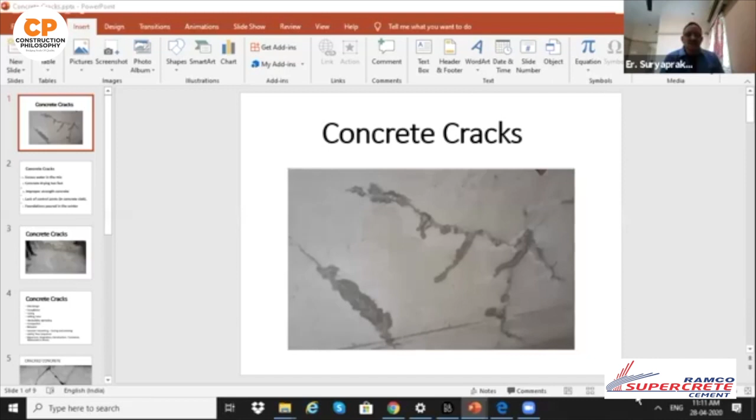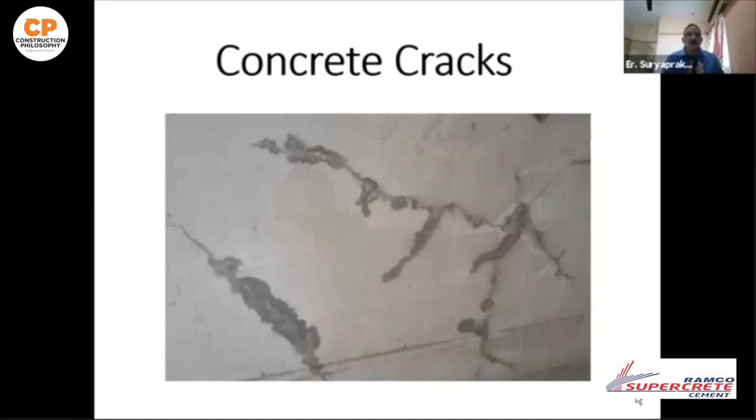Can you tell us how to classify it? Okay, so I'll be sharing my screen and give a small slide presentation for 2-3 minutes. As you can see, cracks in concrete can be classified into two basic categories. One is non-structural, that is cracking due to bad concrete itself. What we are seeing here is bad concrete cracking, as shown on screen. The other cracks in concrete are due to structural issues. Today we'll focus on concrete cracks by itself, since structural issues are a huge subject on their own.

So the main reasons for cracks in concrete are excess water in the mix, meaning water-cement ratio used more than the design mix; concrete drying too fast due to dry climate or higher temperatures like summer in India; and improper strength concrete, meaning the concrete mix not complying to the design mix.

Then lack of control joints. These are joints we provide in concrete because of the time taken for concreting. Sometimes they're called cold joints, sometimes construction joints, sometimes working joints, and expansion or shrinkage joints—many types of joints exist. If we don't provide the joints required in the concrete, that can also cause cracking, mostly in floors and large areas of concrete.

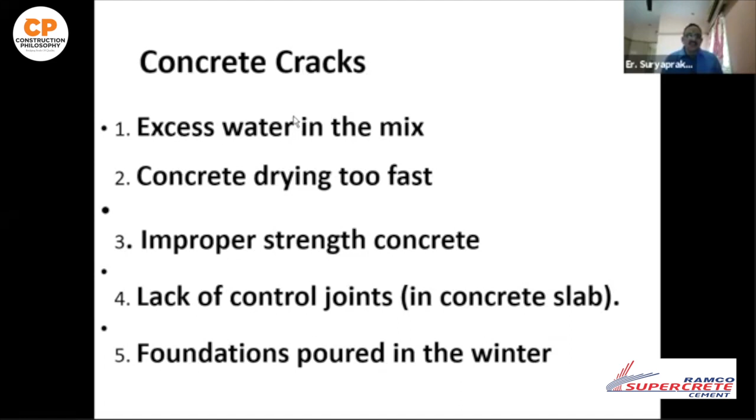Then foundations—whenever foundations are cast during winter, due to low temperature, cracks can happen. This is a crack being monitored. You can see on the screen the extent of the crack in the floor; we dig into the crack and see its depth, and monitor the progress of the crack also. This is the flooring, you can see.

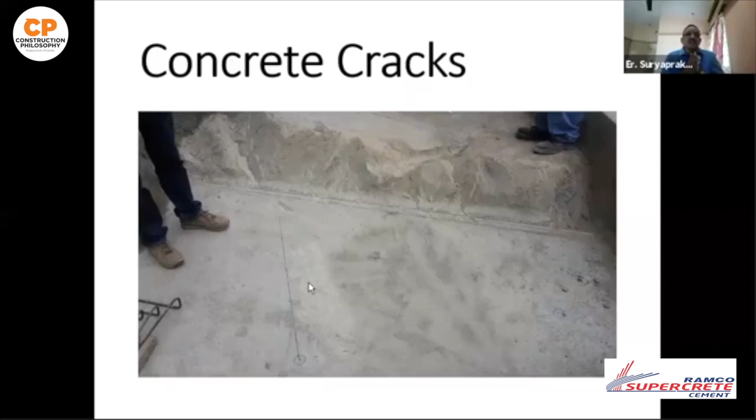So now, the causes for cracks in concrete include mix design compliance—whether it's aggregate quality, aggregate source, or cement quality and cement source—and then curing period, type of curing, and setting time. This is a major cause, actually, of what I have come across in the project.

The ready-mix concrete, particularly concrete from a batching plant, whenever we use the retarder, the design of retarder would not have been adequate, and then there should have been initial setting, and then we'll use the concrete which has already set initially. That will cause problems in workability and spreading. Even concrete compaction can also cause problems if we don't properly compact, vibrate, or spread the concrete across. And then retarders are used in ready-mix concrete to delay the initial setting time.

And then summer concreting. This is a major thing we face in dry climates, particularly in summer, when quick setting happens and shrinkage cracks start forming even before final setting happens. So for that, the solution is to cover an LDP sheet as we pour the concrete so that evaporation is controlled and proper setting happens.

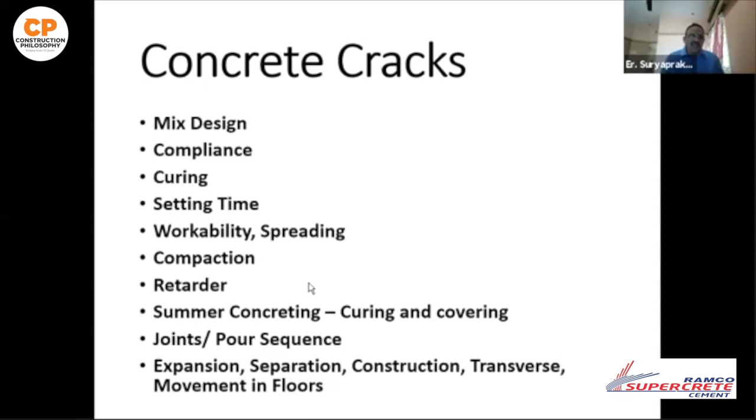As per IS code, you should not have a concrete panel more than 20 square meters. And also allow movement in the floor, because most of the time we have these floors on a PCC. So due to friction at the bottom, there will be movement, and at the shrinkage time, there will be friction and movement in the top layer, and there will be cracks in the top surface. So we have to allow movement in the bottom layer of the concrete by providing an LDP sheet or a smooth surface. So these are the main reasons, and the concrete cracking can be so disastrous also if it is not properly done.

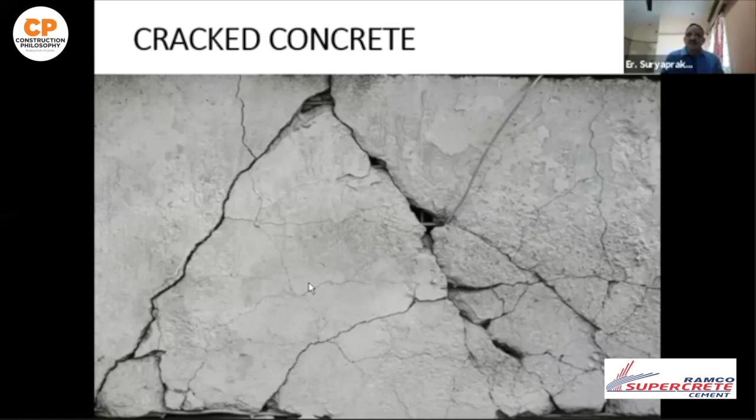This is a concrete where initial setting happened before pouring the concrete.

And reasons other than concrete itself are detailing also. If reinforcement is not provided where it is required in mass concrete, particularly all faces of the concrete should have reinforcement, and also the laps. In some case, we have come across in a column in a government project, the column, all the laps are provided at the same level, and when de-shuttering happened, the whole concrete cracked in the column. So this kind of cracking can also happen.

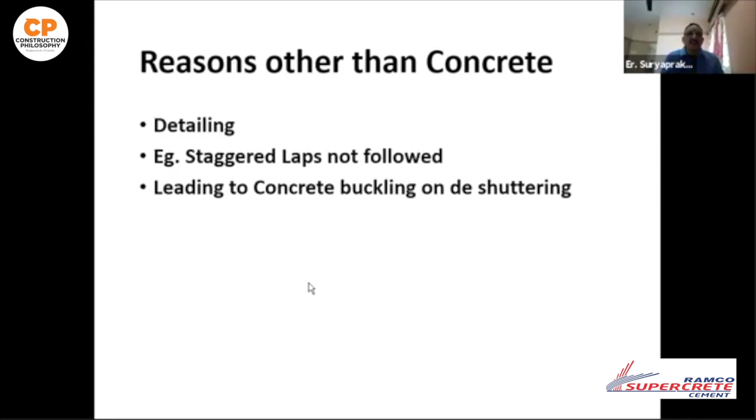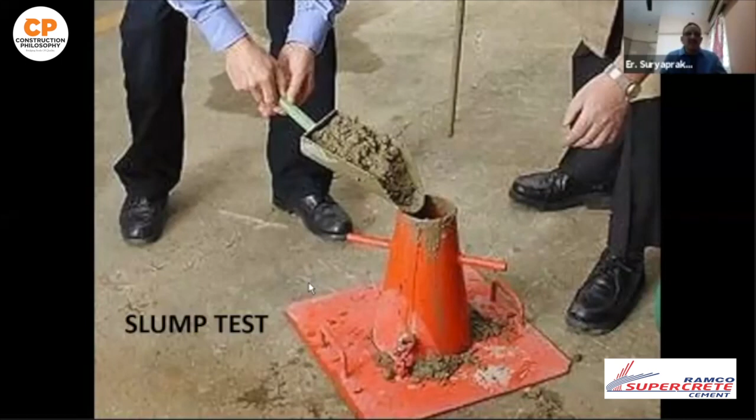And the quality test before and after is also very important for the concrete. So slump test, particularly for the workability, and spread test in case we use the flow mix. These are the requirements of all the tests to be followed meticulously as per the code provisions.

So finally, quality assurance can avoid cracks, quality ingredients can avoid cracks, and quality workmanship. And more than all this, the engineer has to engineer and the engineer has to do engineering. This is the main thing.

And as we all know, for the concrete to be ready, it takes 28 days for attaining its strength, and 40 days including prior preparation - aggregates, procurement, cement. So 40 days production time is not a small thing, and it requires proper monitoring to get concrete that is properly attaining its strength and durability. So that's my thing. So thank you, Nebu, for giving this opportunity.

The opinion is really clear, actually. I would like to bring in Dr. Sunita. Dr. Sunita, basically we have many aspects, many factors that affect the cracking of concrete, and that includes materials as well. So since you are into materials, what kind of strategy do you think we have to adopt for bringing in a crack-free concrete culture in terms of materials?

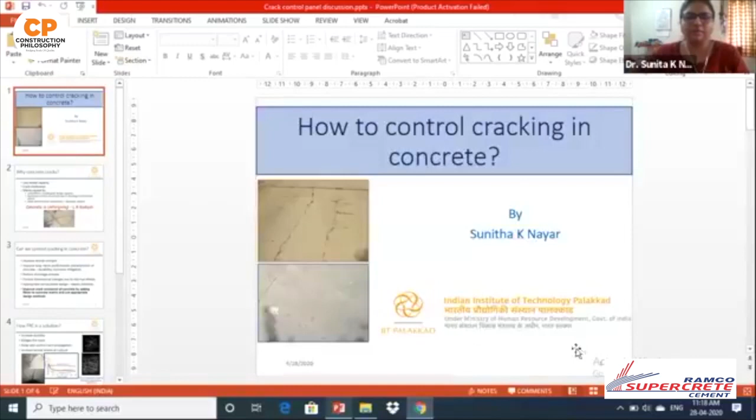Yes, yes, yeah. So good morning to one and all. I'm Sunitha, and I'm a faculty at IIT Palakkad. My area of expertise is in building materials and construction technology, and my research is specialized in high performance concrete.

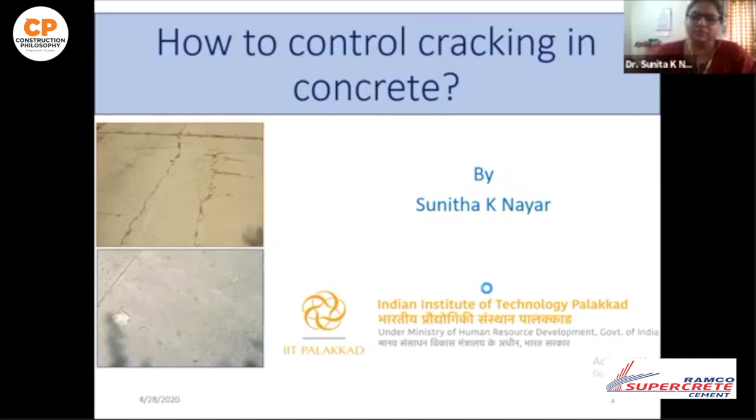Engineer Surya Prakash has set the platform clearly and well for discussion, because he's clearly told from the construction point of view what are the factors that contribute significantly to cracking. I think my role here is to contribute to the solution through research and academic findings, as Nebu has told. So from a materials perspective, most of the cracks are related to low tensile capacity.

I'm purely talking about what causes the manifestation of cracks in the material. I think it is related to the low tensile capacity and the inherent brittleness in concrete, which leads to crack intolerance. Now, if you look from a materials perspective, all the factors that Engineer Surya Prakash mentioned, if we convert it into a material concept, what can we attribute these cracks to?

One is, of course, the inadequate design capacity, which is the load effects. The other would be the long-term performance characteristic, due to restriction of free movement from dimensional instability. And I think one major factor we have to consider is the deterioration mechanisms, whatever crack is caused due to durability related issues.

If we see in detail, this is one sentence that, if you all know Dr. Kadiyali, he always used to say concrete is unforgiving. What he means is that if you make a mistake and the crack comes, it's very difficult to cover it up. So you have to start thinking about this before you lay the concrete. I think that's what Engineer Surya Prakash sir was also emphasizing on, the quality control.

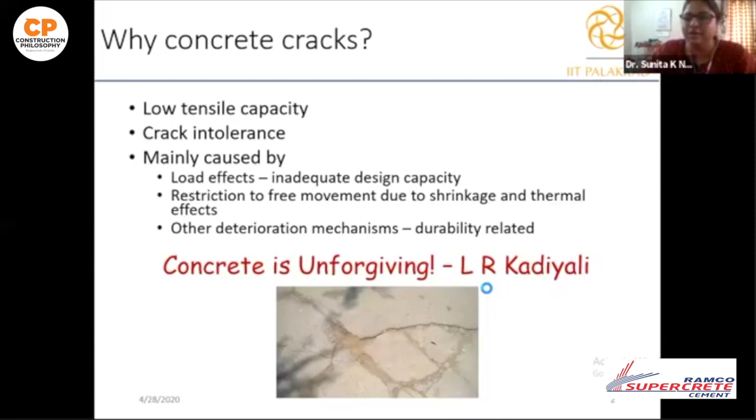So let us see from the materials point of view, what can be done to improve the cracking characteristics in concrete? As I said, it's directly or indirectly related to the tensile characteristics. So one strategy would be to improve the tensile strength. This is something we are all trying to do, but it's not always practically possible, increasing the tensile strength.

Mr. Anil will be able to tell what the restriction is in the possibility of increasing the tensile strength with respect to our binders. The other strategy would be to improve the long-term performance characteristics of concrete.

The characteristics that improve durability, one of the major causes of cracks is corrosion. How do we mitigate this corrosion? If you can do this, the long-term performance of concrete can be improved, and all cracks related to these characteristics, maybe due to chemical attack, acid attack, or corrosion, can be mitigated.

The other strategy would be to reduce the stresses itself, such as reducing shrinkage stress using shrinkage reducing admixtures, or controlling dimensional changes due to thermal effects. This is something like neutralizing curling completely, or reducing the temperature difference in the concrete, reducing the stresses due to temperature difference. So many strategies can be adopted from the material point of view.

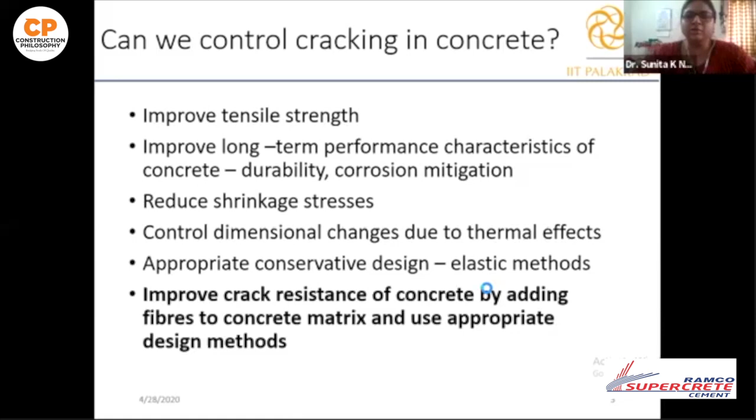Similarly, can we adopt a strategy where concrete itself has characteristics so that cracking does not occur? Or improve the crack resistance of concrete by improving its crack performance. For this, one option, not the only one, is to add fibers to the concrete matrix, because fibers improve the crack performance.

What it does is, essentially, the fibers bridge the crack. It doesn't mean cracks won't happen, but even if they occur, the cracking will be very limited in its crack widths, because the fibers increase ductility, delay and control crack propagation, and increase the tensile strains at rupture. This is all because of the post-cracking characteristic demonstrated in the load deflection curve here.

This blue one is for plain concrete with almost very brittle failure. Sorry, the orange one is the plain concrete, whereas the other three show some post-cracking capacity, meaning it is resistive enough to hold the crack together.

So this is how fibers are distributed in the concrete matrix, so that in any direction a crack occurs, a fiber will be encountered and it prevents cracking.

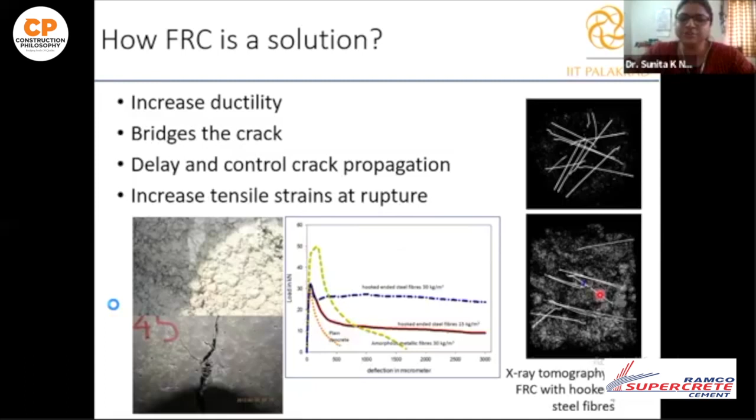Let me show you one example where there are two adjacent road pavements laid at the same site - this is plain concrete and this is FRC concrete. Now you can see there is a crack, and even in the FRC you can see a crack. It's almost of the same age, but the crack width is so minor that it does not affect the serviceability at all. So this is also possible - this is imparting an inherent cracking resistance capacity to concrete.

This is one of the strategies that you can adopt. I think Dr. Elson will be talking a lot about the durability and long-term performance characteristics that you can improve in concrete. I think that's what I have from my side.

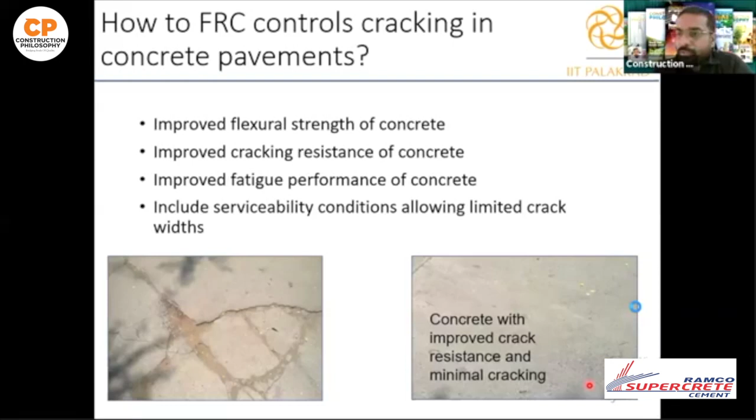Well, Dr. Elson, these days the technology of manufacturing concrete has drastically improved. The term specific or special concrete has emerged in recent times. So how do you identify the need for or the choice of special or specific concrete?

Okay, thank you, Nebu. Sunita and Surya Prakash were talking about the cracks and the remedies for that. So for addressing this question, when we are talking about special concrete, we should understand what the reasons for cracking in concrete are and where and when it occurs. That is very important. For that, I also will have a small presentation. I think I can share the video screen. Yes, go ahead.

So again, why does concrete crack? As Sunita was mentioning, concrete cracks when the tensile load exceeds the tensile strength of the concrete. That is true for many materials, not just concrete. But the specialty with concrete is that it starts cracking before the strength attains itself - in the plastic stage itself there is a possibility of cracks.

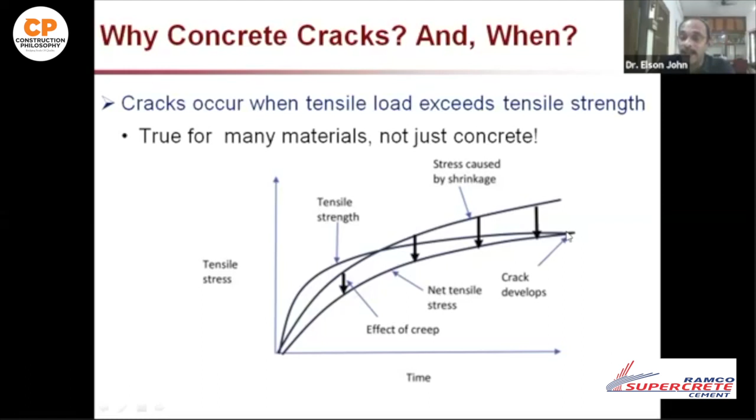So if you look at the tensile strength, concrete has a certain tensile strength. Let me take the pointer. The creep, shrinkage, everything gets added, and the net tensile strength demand on the concrete goes up. So when it becomes equal to or exceeds the tensile capacity of the concrete, the crack starts.

So why does concrete crack, and when? That's again a question. Concrete starts cracking just after it's finished and stiffening starts - that means plastic shrinkage cracks just after the final set. There can be disturbance, crazing, etc. Within a few days after setting it can happen, or several years after setting, like corrosion, shrinkage, and so on. We'll see the different types of cracks.

So even some cracks can occur at a much later stage, even after decades. The time depends upon the quality of the concrete, the exposure conditions, the ingredients of the concrete - a lot of other parameters are there. So the causes could be physical, chemical, or mechanical.

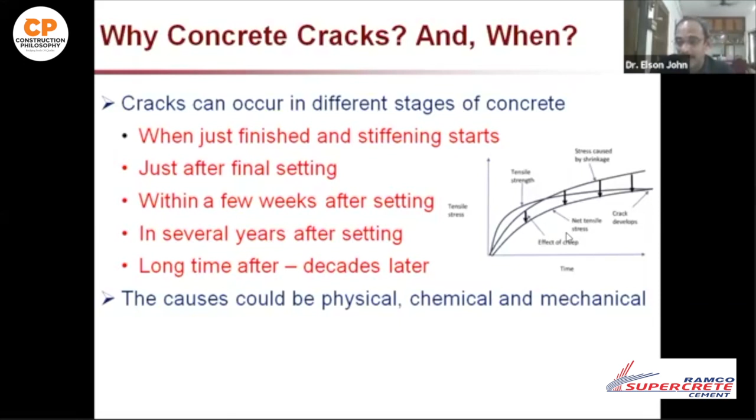So if we classify the cracks in concrete, broadly we can classify them into two: one is structural cracks, and the other is cracks due to material problems in the concrete. So let's start from the beginning.

So cracks can occur before hardening of the concrete itself, in the plastic stage of concrete. So the main problems are plastic shrinkage cracks and plastic settlement cracks. Let me show you how it occurs.

So again, there's always the possibility, but most of the time we are neglecting it. There will be formwork movements while moving the formwork, or settlement of the supports. Again, for slabs on grade, there can be subgrade movement also that can lead to cracking of concrete.

So after hardening, there are many reasons for concrete to crack. One is the physical reason - drying shrinkage of the concrete. That is due to the evaporation or removal of water from the concrete, and that can become a structural crack also in most cases, even though it's happening at the material level.

Then there's crazing of concrete. Then there can be chemical reasons for cracks to occur - corrosion of the reinforcement, alkali-aggregate reactions, cement carbonation. There are other chemical reactions also like sulfate attack, chloride attack, etc. But that won't make cracks in the concrete in many cases - sometimes sulfate attack may come, but that will disintegrate the concrete.

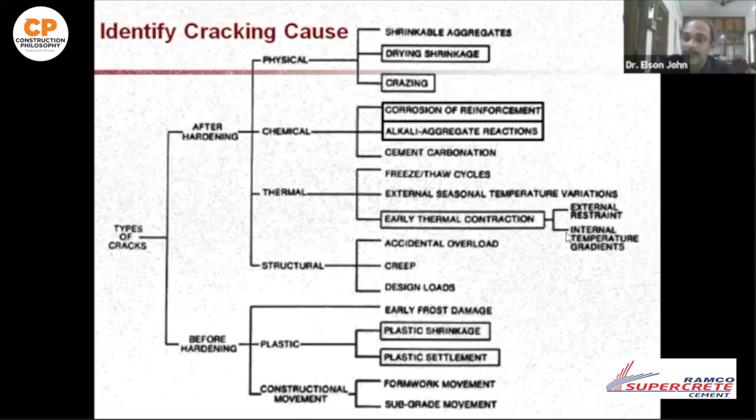In addition to that, there are structural reasons for cracks: accidental overload like fire, earthquake, etc., creep, and then the design loads.

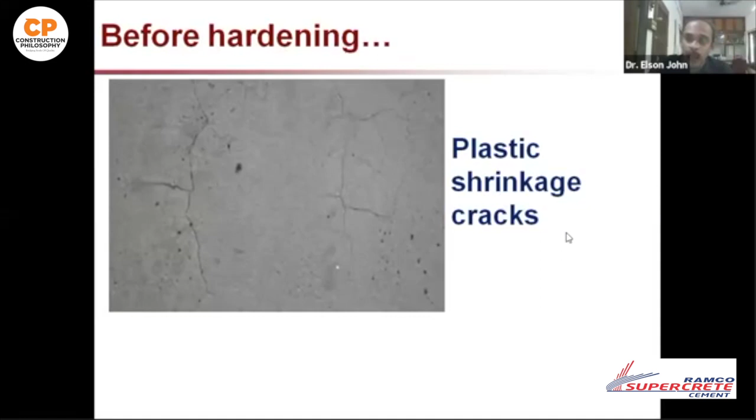So let us see some of the types of cracks and how they occur. Plastic shrinkage cracks can start within a few minutes after the concrete is placed and go up to the initiation of hardening, a few hours. So we can see the plastic settlement cracks.

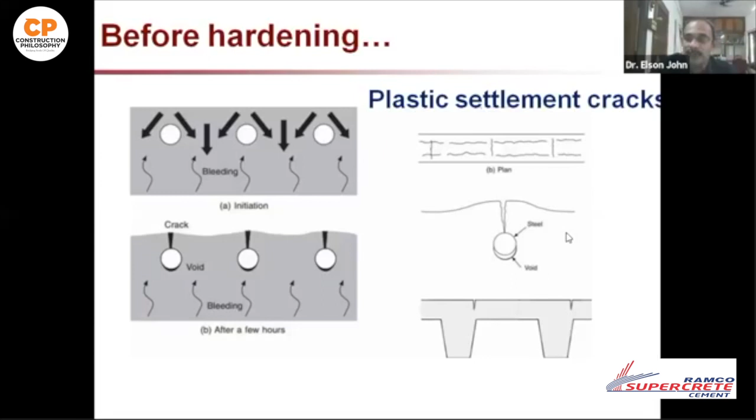In the first stage, concrete is saturated, so the water will bleed out to the top, and the solid materials will have a tendency to come down. All the other parts, except above the reinforcement, the material is free to settle down. So above the reinforcement, tensile stresses develop and you can see cracks.

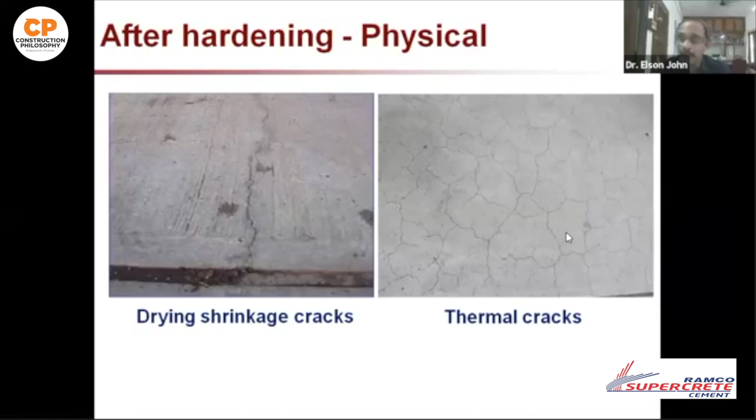Then subgrade changes, then drying shrinkage, that is removal of water from the pores in the concrete, then thermal effects, especially for mass structures, where the inside temperature of the concrete will be high while the surface is exposed to the atmosphere. So there will be a temperature gradient, and that can lead to cracking.

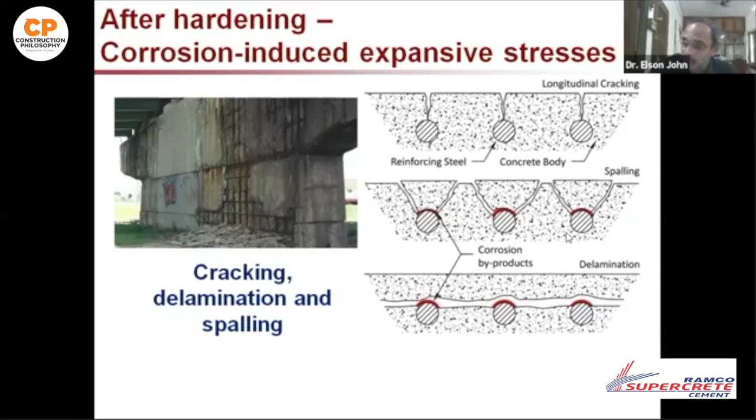Then sulfate attack, alkali aggregate reaction - you can see map-like cracking in the structure. Again, corrosion of the reinforcement: when the reinforced steel corrodes, its volume expands, exerting pressure on the concrete, which can lead to cracks and spalling. Also freeze-thaw resistance and thermal cracks. This is a very interesting figure.

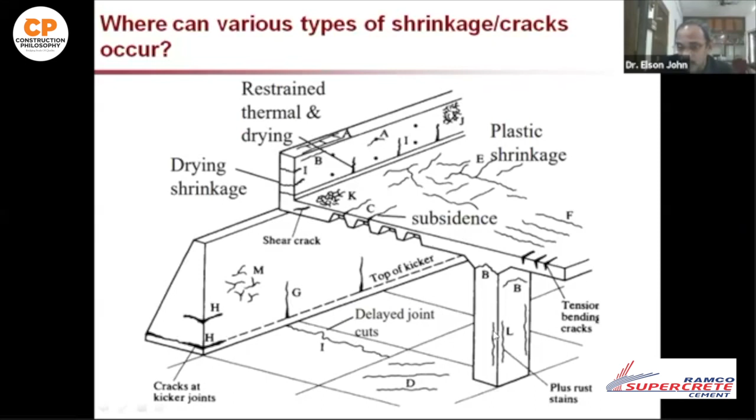We have drying shrinkage cracks, and these are cracks due to corrosion of reinforcement. It's a very big topic, so I'm not going into much detail on that.

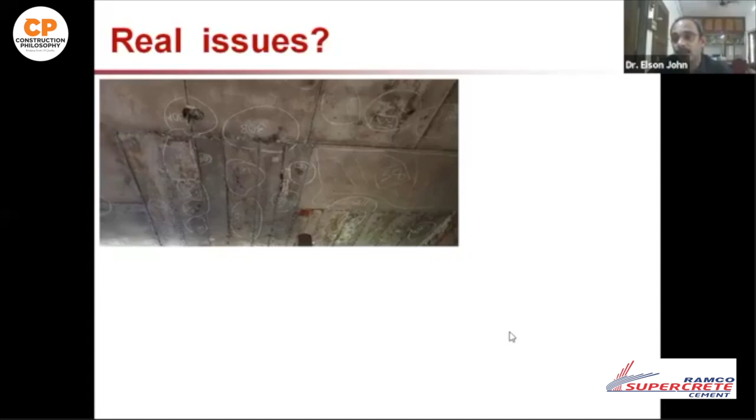Mainly because of disturbance and plastic shrinkage cracks, some of the cracks are extending through the concrete, and you can see water percolating through the line cracks into the affected areas.

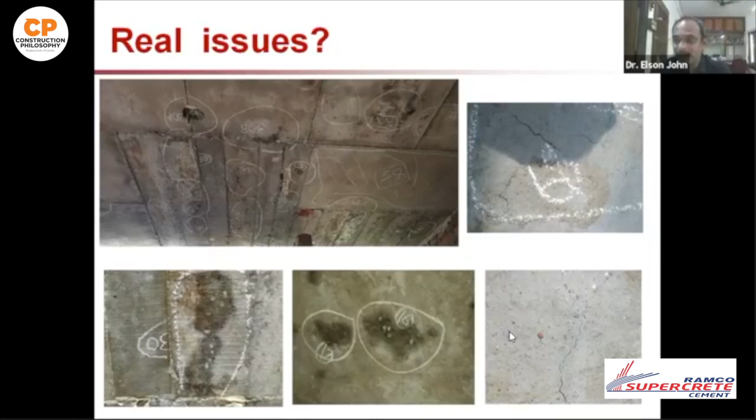So cracks are a usual issue. A crack is like a cancer in our concrete - if we can find it and repair it at a proper time, we can extend the service life of the structure. Otherwise it is very dangerous. So always prevention is better than cure.

With this, each time we have to address - when talking about special concrete, different types of concrete - for initial stages we have to reduce the temperature. We have lots of admixtures to address this, mineral admixtures as well as chemical admixtures. But each case should be addressed properly.

Generally the cracks are not seriously taken and it is ignored - most likely covered with plaster, paint or something. Yeah, that's it. So it's advisable to always have an expert opinion when you find a crack, even if it is small or big.

Mr. Anil Pillai, the cement industry now has introduced many special kinds of cement, like quick setting or sulfate resistant, or many different types of cement with different characteristics. Do you have a product specifically for reducing cracks?